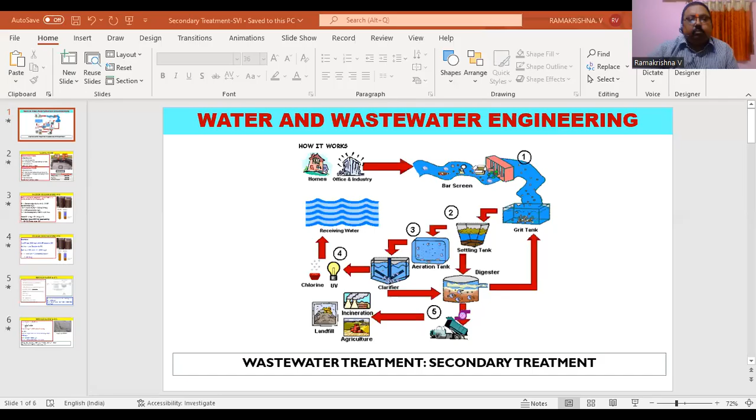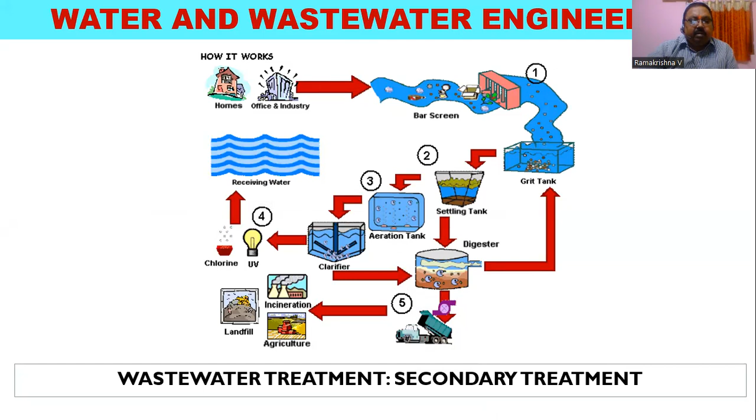Welcome back. We are talking about wastewater treatment, under which we are discussing different treatment operations under secondary treatment. In this video, we will be discussing one of the most important parameters in the activated sludge process, secondary treatment: MLSS, MLVSS, and sludge volume index.

So now if you look at this particular picture, what you are noticing is the primary effluent is now entering into the aeration tank. This is the aeration tank. In the activated sludge process, we are recycling some amount of the sludge back into the aeration tank. So a part of the return sludge is now joined here. And these two are combined to form a combination of normal solids entering the aeration tank plus a higher concentration of the sludge solids, which we are calling mixed liquor suspended solids, MLSS.

And there is some volatile portion also in this, because this MLSS consists of inorganic as well as organic solids. Organic solids are volatile, so that's why they're called MLVSS, which are usually around 80% of the MLSS. So how are you going to determine the MLSS? Once we take a sample from this liquid, we use a gravimetric method for determination of MLSS as well as MLVSS. The procedure is similar to how we determine total solids and total volatile solids from a wastewater sample.

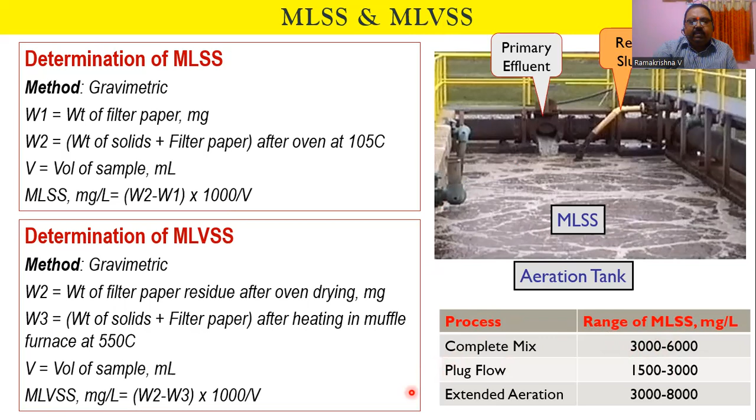If you look at the data regarding the concentration of MLSS in milligrams per liter, the complete mix process is around 3000 to 6000 milligrams per liter. Plug flow process is around 1500 to 3000 milligrams per liter. Extended aeration is 3000 to 8000 milligrams per liter. This MLSS concentration plays an integral part in designing the parameters of the activated sludge process. And in some cases, we also use the MLVSS concentration, which we take as approximately 80% of the MLSS concentration.

Now, another parameter of most significance in the activated sludge process is the sludge volume index. It is defined as the volume occupied by 1 gram of MLSS in a 1 liter volume jar after 30 minutes of settling time. The settling MLSS is nothing but the recycled sludge coming from the secondary sedimentation tank. So we want to know the sludge settling after secondary sedimentation. For that, we go for this test.

So how much volume is occupied by 1 gram of MLSS in a 1 liter volume jar after 30 minutes of settling time? We take a 1 liter volume jar, put in the recycled sludge, and note down the volume of settling after 30 minutes. At the start of the test, all the water and solids are thoroughly mixed, so there is no segregation and separation. After 30 minutes, the solids are settled down, leaving water at the top. We take the volume of this settled sludge and the concentration of MLSS, and based on this information, we calculate the sludge volume index.

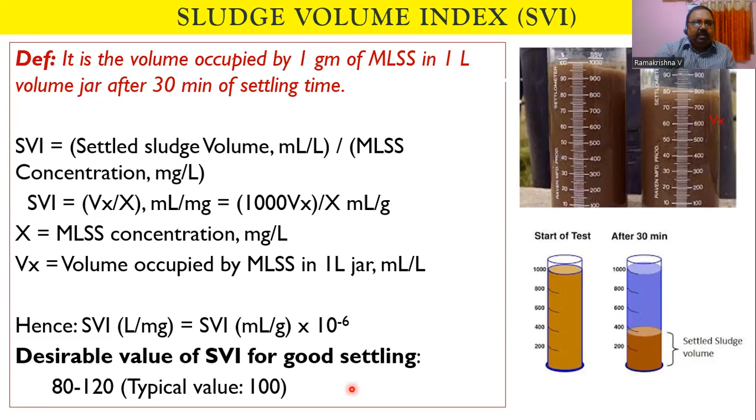Let us take a small example to understand the calculation. In an SVI test, 3000 milligrams per liter MLSS settles to 300 ml in a 1 liter jar. Calculate its SVI. Vx is the settled volume, given as 300 ml, and the initial concentration of MLSS, x, is 3000 milligrams per liter. So we have Vx by x, with Vx equal to 300 and x equal to 3000. For the conversion factor, we put 1000 here. So ultimately you get 100 ml per gram. A value of 80 to 120 indicates good settling in the activated sludge process.

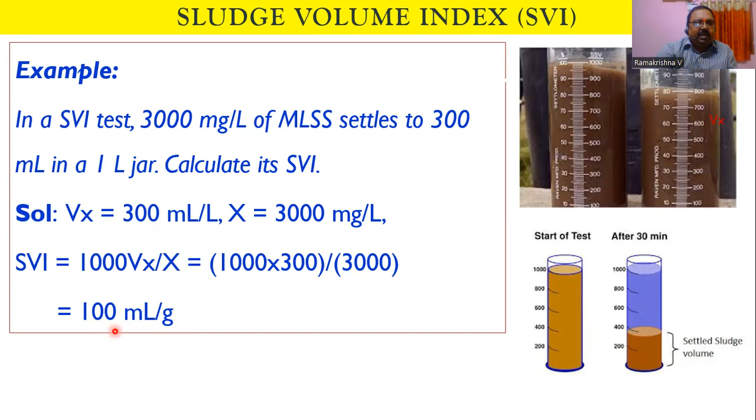In the numerical calculation, what we obtained is 100 ml per gram. Another parameter which we talk more in the activated sludge process is the recycling. But what we are talking about here is the sludge volume index, for whatever sludge is now coming down from the secondary sedimentation tank. For this SVI, we have calculated to understand the settling performance of the sludge.

So now the second part is how much sludge is recycled back. The volume of sludge recycling is QR and the influent volume is Q. The recycle ratio we call QR by Q: how much volume of recycling is done relative to the initial volume Q. You write down QR by Q. And how to do this calculation part?

Now let us take a system boundary here: aeration tank and clarifier together as a single unit of the secondary system. So the solids entering are X naught and going out is Q minus QW. QW is the wastage volume, Q is the initial discharge, Xe is the concentration of solids going out. This is from the effluent cycle, this is from the sludge cycle. QW is the wastage volume of the sludge and XR is the recycled sludge concentration.

And this much sludge is now going back into the system, where V is the volume, XR is the recycled sludge concentration and QR is the recycled sludge flow rate. So if you write the mass balance, whatever solids are present equal what goes out in the effluent line plus the sludge line. So here Q plus QR, and the concentration is X now. This MLSS concentration after mixing with the recycled sludge is nothing but your X here.

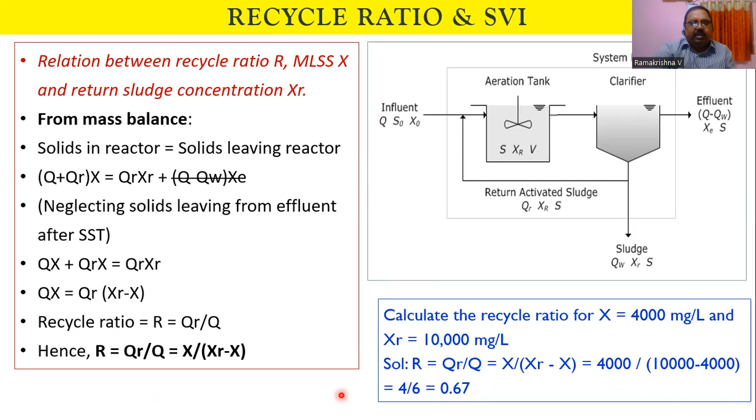This is how we calculate it. And if you know XR, we can also calculate the SVI from the relation. This snapshot shows the sludge coming out from the sedimentation tank in settled form. The recycle ratio QR by Q is equal to R, so R is equal to X by XR minus X. Using a mass balance, we can also write this equation as X by 10 to the power of 6 by SVI minus X. Comparing these two, XR is equal to 10 to the power of 6 by SVI, with SVI in milliliters per gram. So let us try to apply this formula.

Calculate the recycle ratio for SVI of 100 ml per gram and MLSS of 3000 milligrams per liter. So XR is equal to 10 to the power of 6 by 100, which is 10,000 milligrams per liter. Now substitute into X by XR minus X: 3000 divided by 10,000 minus 3000, which is 3 by 7, 0.43.

Sometimes the sludge density index is another term used for the settling of sludge in the activated sludge process. It can be defined using MLSS in milligram per liter and settled volume in ml per liter, with conversion factors, multiplied by 100. So it's also written as 100 by SVI. Since we already calculated SVI, we can directly calculate 100 by SVI. The desirable value of SDI for very good sludge is around 1 to 2. That means if SVI is equal to 100, the SDI is equal to 1.